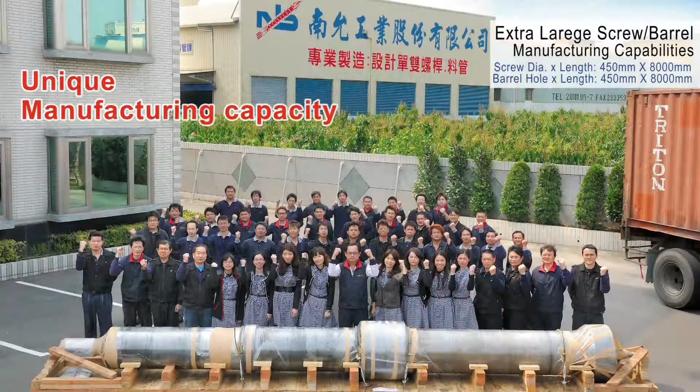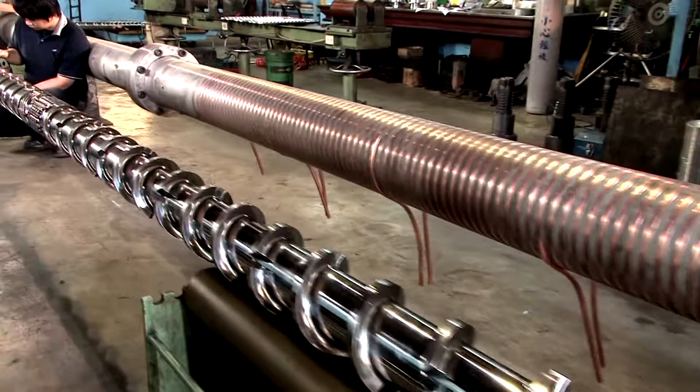Nan Yun Industrial Company Limited, established in 1993, specializes in design and manufacture of complete series of screws and barrels for plastic and rubber extrusion and injection machines, including all types of screws with special alloys and special flights that meet all clients' needs in extrusion and injection molding.

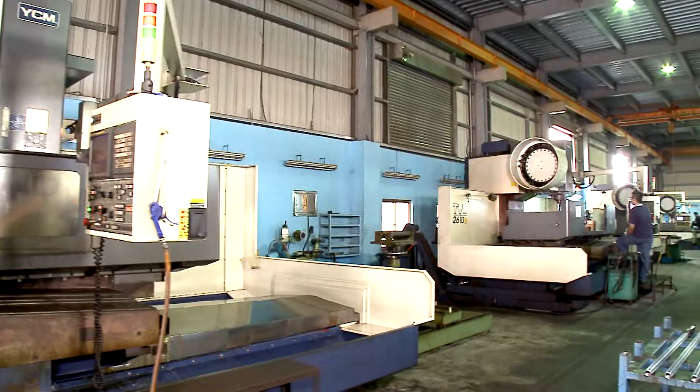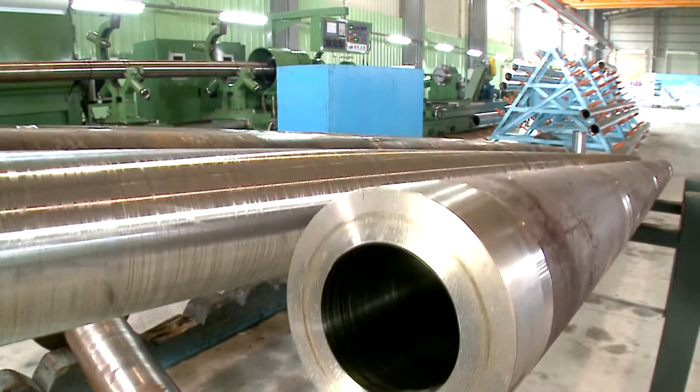By upholding our ideals in innovation and breakthrough, technological leadership, insistence on quality, Nan Yun Industrial has been growing steadily, continuously surpassing our competitors, and has achieved in producing high performance and highly versatile products that others are unable to make. After working persistently for more than a decade, Nan Yun has become the largest and most modernized screw and

barrel manufacturer in Taiwan, with a monthly production capacity of more than 500 sets. Nan Yun holds the leading position in the Taiwanese industry, in which its product quality has received high recognition by clients around the world.

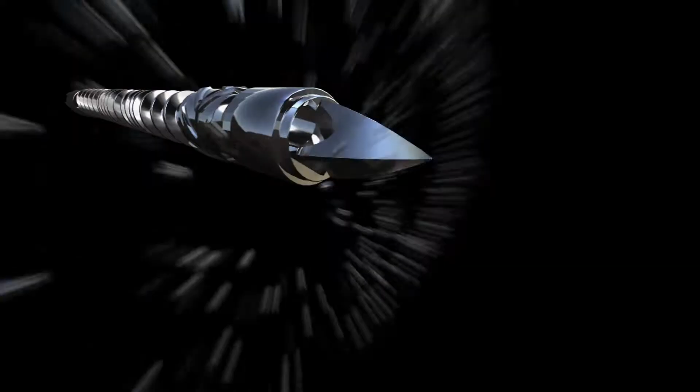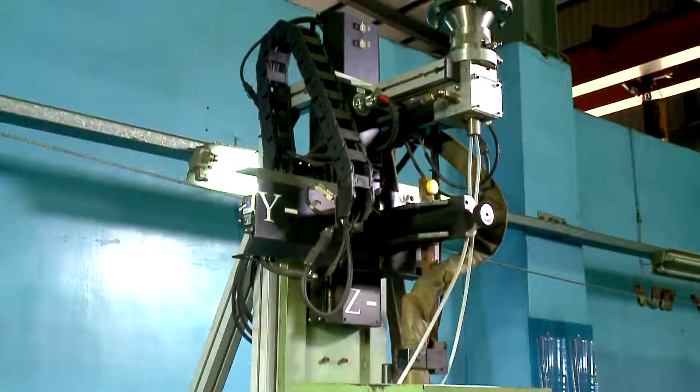Consolidated production. Pursuing the highest quality of screws and barrels is Nan Yun's persistence. Nan Yun has invested heavily on purchasing various advanced processing equipment, gradually established a complete integrated manufacturing process, which all of the processes are done in modernized production lines in sequence, so that the quality of each manufacturing process is

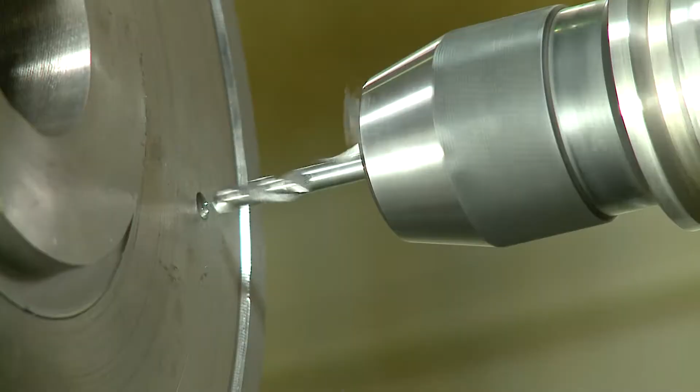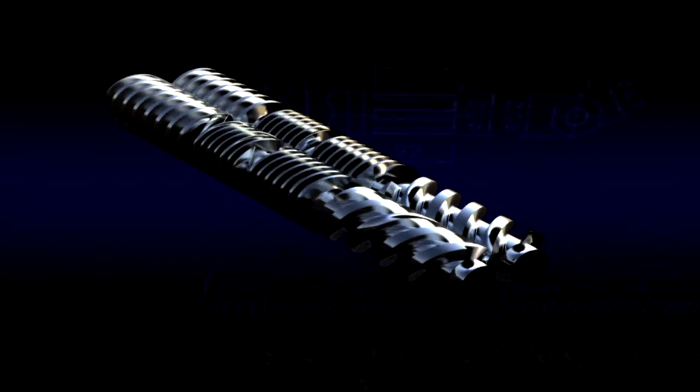fully under control. Nan Yun's design department is capable of conducting comprehensive analysis based on client's machine model, production capacity, and resin property, dedicated to design the optimized screws and barrels for every client. Every screw parameter is based on professional theory and design with extensive practical experience. These ensure that Nan Yun's design and manufacturing of screws and barrels can truly help clients to increase product quality and production efficiency.

Raw materials import. Nan Yun utilizes imported raw materials from Japan's Daido, Hitachi, Sanyo Steel, and more. Nan Yun offers clients the most suitable and cost-effective material selection based on the production capacity requirements and the property of raw materials for plastic and rubber extrusions and injections.

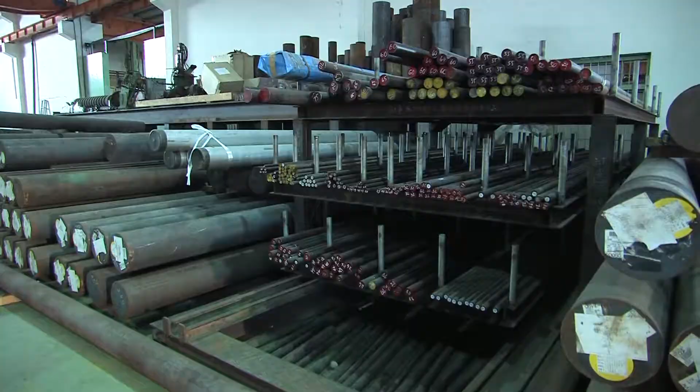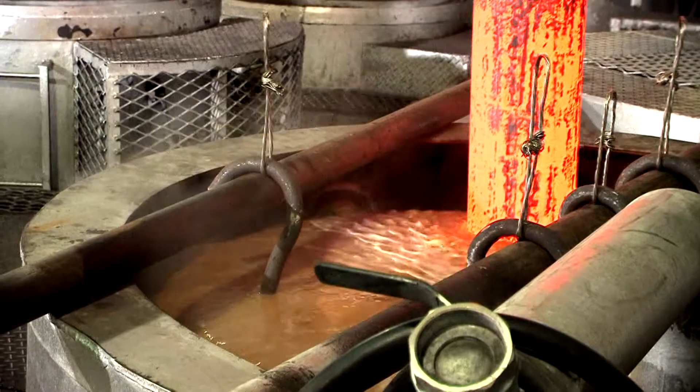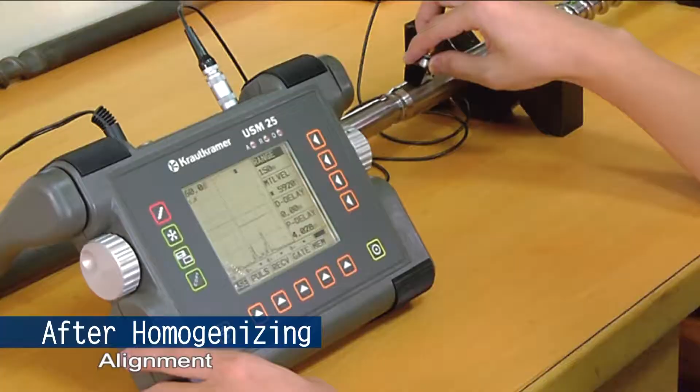Homogenizing. Adjusts material's hardness, increases the tenacity, allows the structure of inner molecules to become finer and more stable to prevent material deformation during processing. After the steel materials are homogenized, they undergo ultrasonic crack inspection, making sure that there are no defects such as welding seams, cracks, pores, before proceeding to the actual processing.

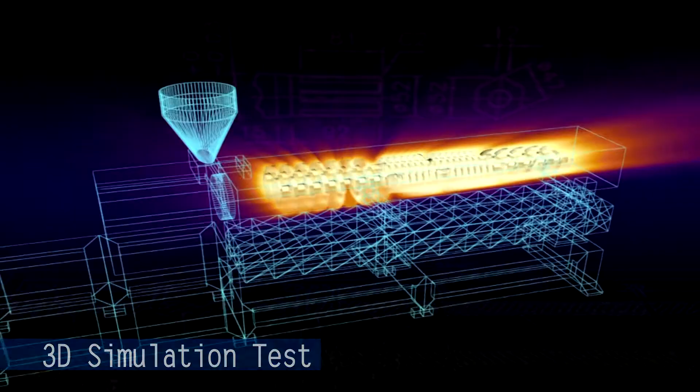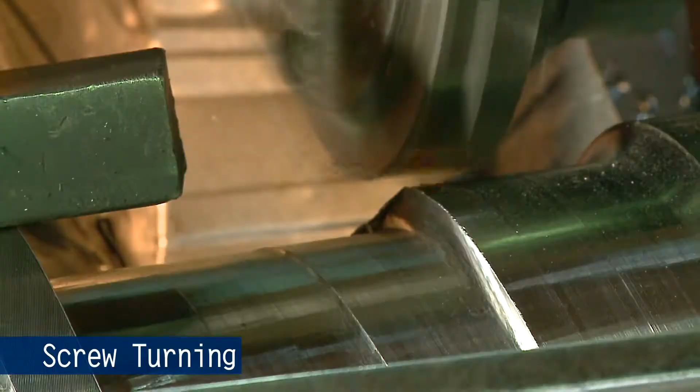Prior to the actual processing, our outstanding technicians perform 3D simulation tests based on clients' drawing schemes to make sure the gear gaps of the twin screw conform to the correct values. From screw rough turning, rough thread rolling, to fine thread rolling and stirring, each process is operated by specialized machines and professional divisions of labor for minor tasks of each process.

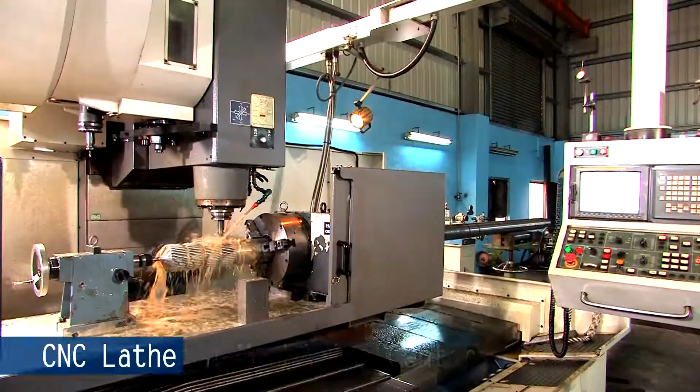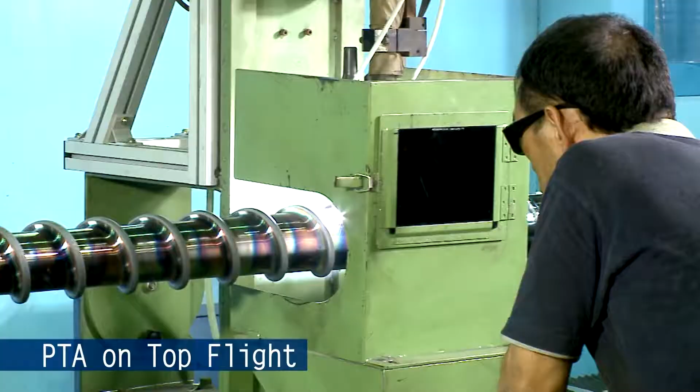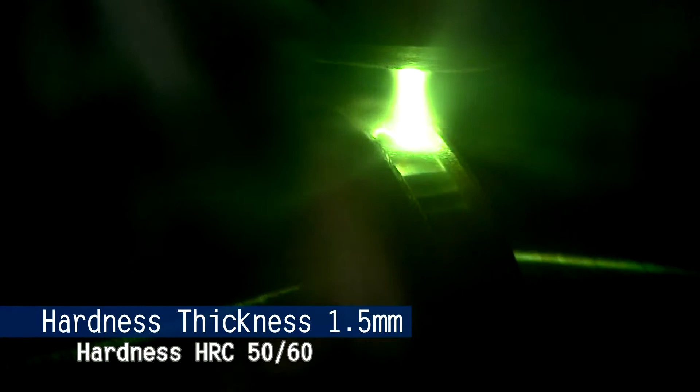For a screw to perform its main functions, such as material feeding, conveying, compressing, melting, exhaustion, and homogenizing on the machine, the PTA nickel tungsten-based alloy spray welding technology fuses the weld tracks and the base metal completely. The hardness layer of a single side is 1.5 millimeters, with a hardness of HRC 50 to 60 degrees. It is durable to wear and corrosion, greatly extending the service life of the screw.

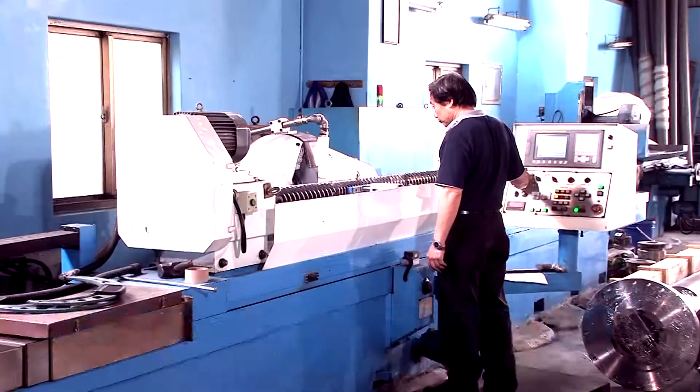Thread polishing. Roughness up to Ra 0.3 microns. Outer diameter grinding, straightness and roundness can reach 0.02 millimeters. The boring integrated with the barrel enables straight and precise processing angle. Even thickness of bore diameter effectively enhances the feeding smoothness of the screw.

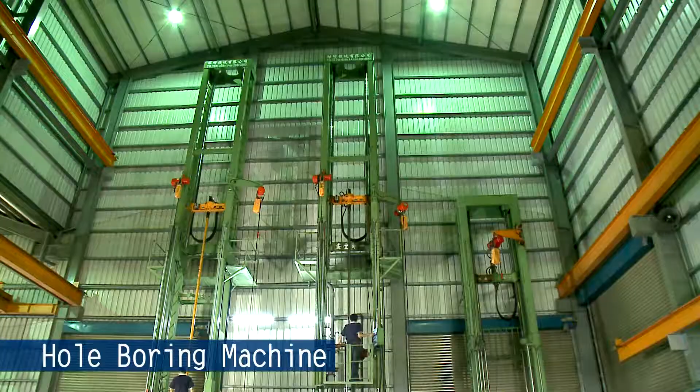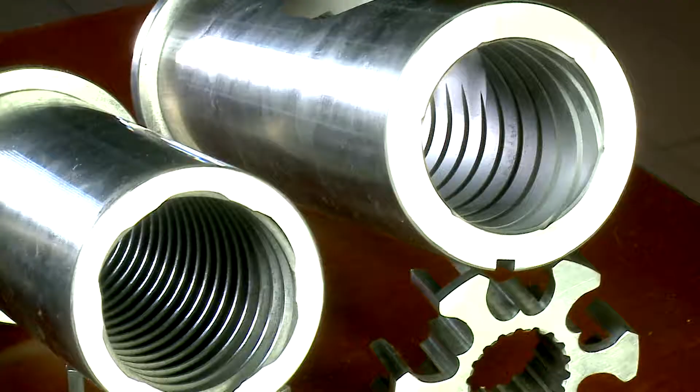Interior rifle groove. Appropriate rifling lines are designed per client's requirement. Automatic computerized precision processing maximizes the production capacity of plastic and rubber machinery.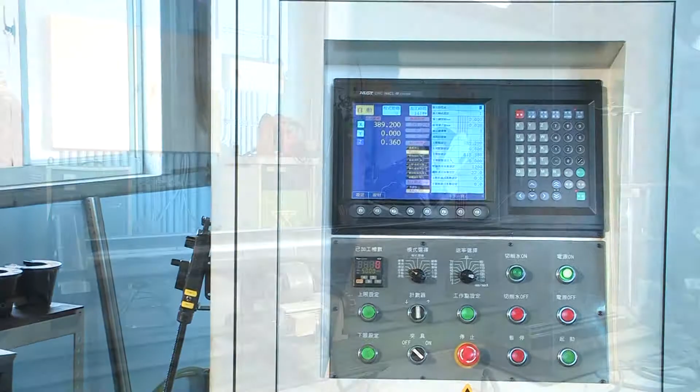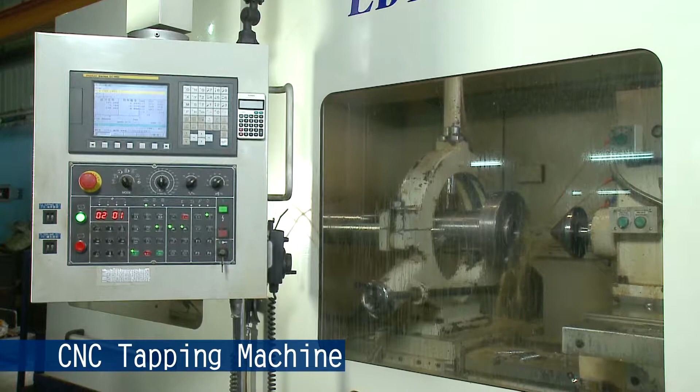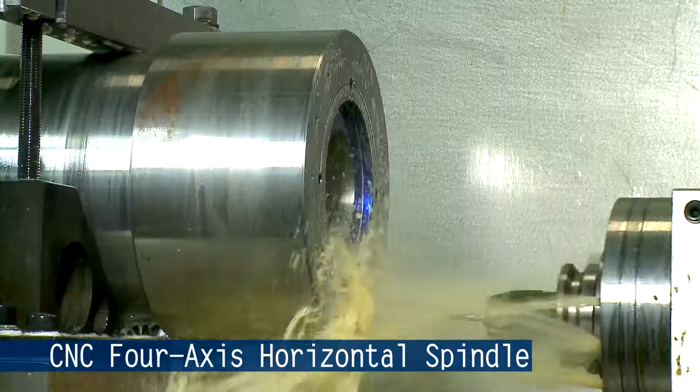Flange drilling. The drilling is preceded by diagonal drilling to avoid any deformation caused by the difference in temperatures, precise bore diameter dimension, with appropriate thread pitch. The barrels and the machine body are tightly latched to each other, creating excellent solidity.

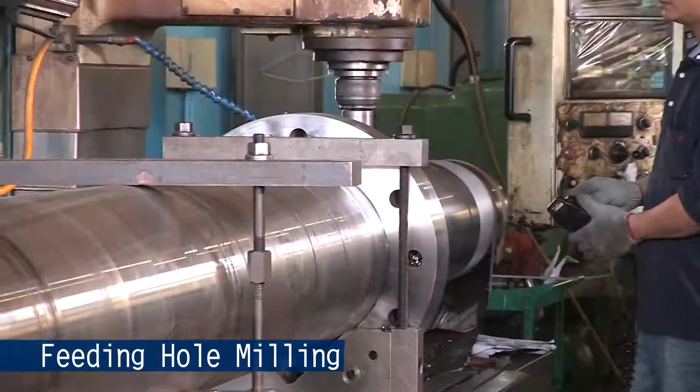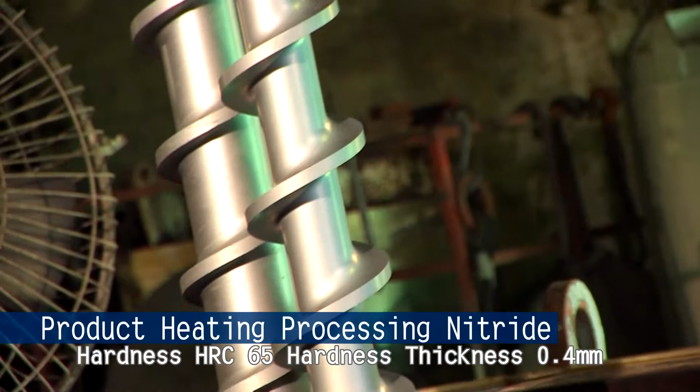Feeding hole milling is processed after nitrogenization. This can ensure the straightness of the barrel bore diameter and reduce the friction with the screw. Nitride. The process increases the thermal resistance and hardness of the material surface and adjusts the hardness and ductility of the material, which increases its wear durability, reduces the wear rate, and extends its lifetime.

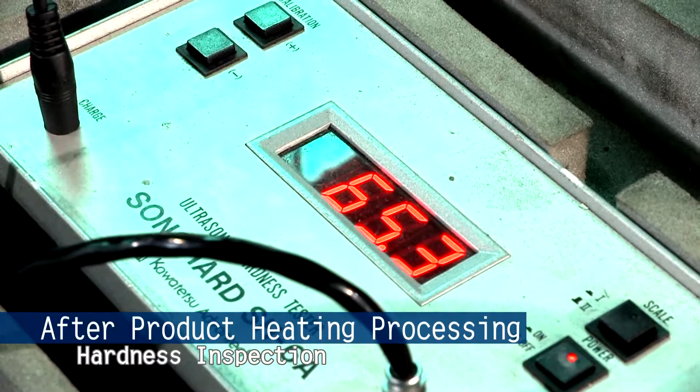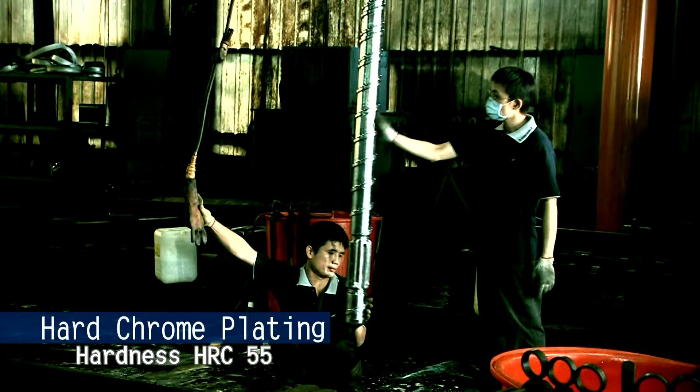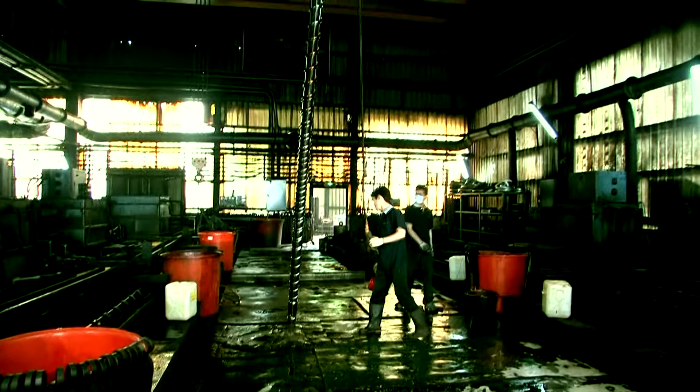Electroplating. Divided into hard chrome plating and phosphor nickel alloy plating. Hard chrome plating can increase the lubrication of plastic and rubber materials, prevents scratches on the surface, enables the screws to maintain their flow coefficient during the melting process, and stabilizes the extrusion and injection performance.

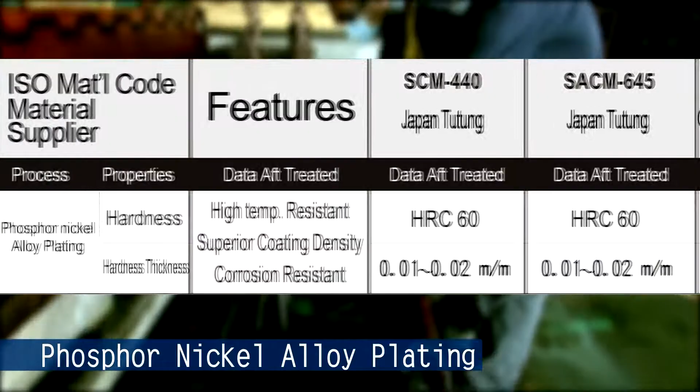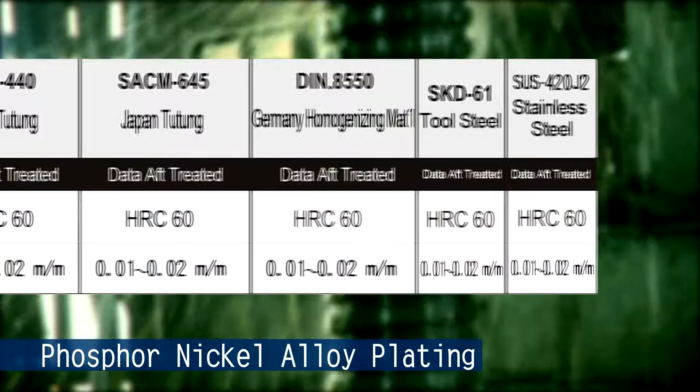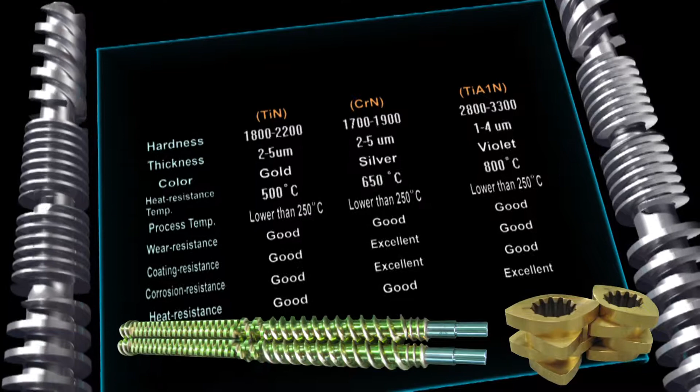Phosphor nickel alloy plating gives materials properties such as high temperature and corrosion resistance. It can also greatly raise the adhesion density of the melted materials to satisfy melting and mixing requirements of all kinds of resin in every plastic and rubber injection machine. PVD ion plating is divided into nitrogenized titanium, nitrogenized chromium, nitrogenized aluminum titanium. Advantage: high thermal resistance, super wear and corrosion resistance.

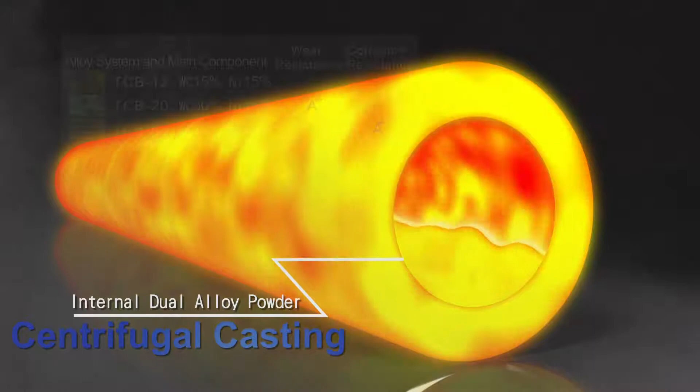Bimetallic barrels. To achieve barrel straightness and roundness, they are ground after going through centrifugal casting and rough boring. The thickness on a single side of the barrel is 2.5 millimeters. It has the properties of wear durability and corrosion durability, longer service time than normal barrels.

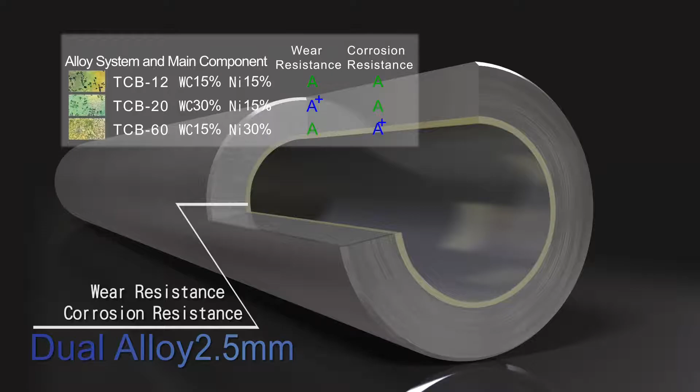Persistence on 100% quality control. As the performance of the machine and the quality of the products highly depend on screws and barrels, every screw and barrel manufactured by Nan Yun has to pass strict, highly standardized inspections before leaving the factory.

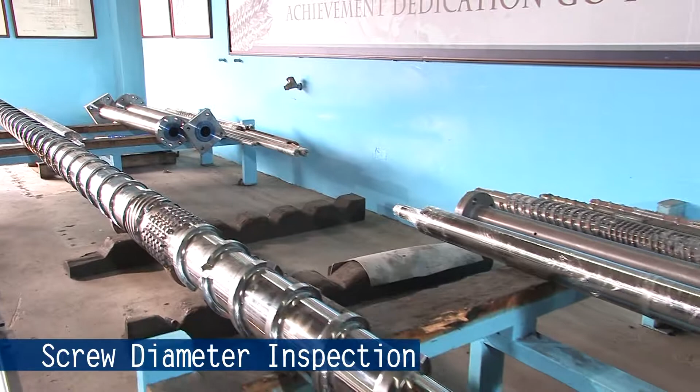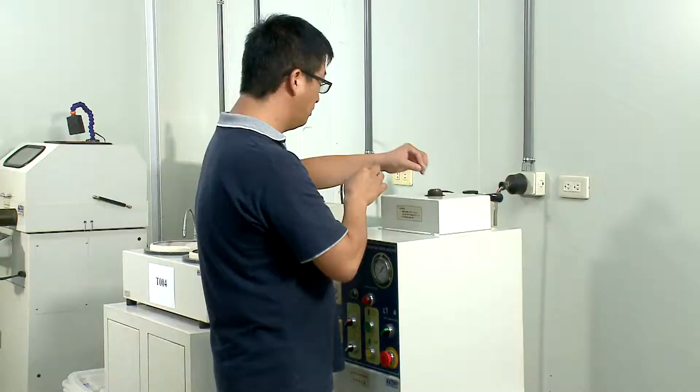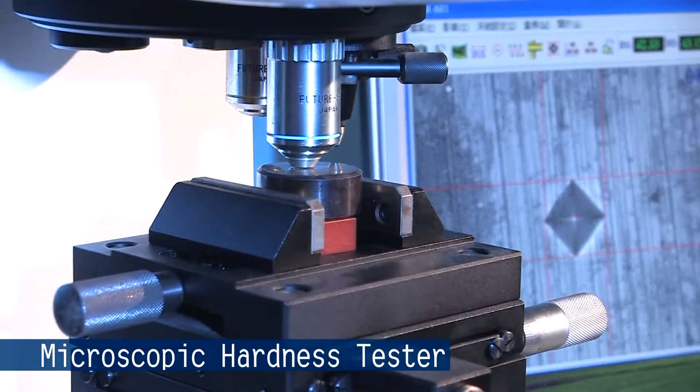Nan Yun's QA division operates many precision inspection instruments to thoroughly perform material feeding, processing, and finished product inspections. The highly strict process control satisfies the quality management demands from the clients and guarantees the quality of Nan Yun's products to reach perfection.

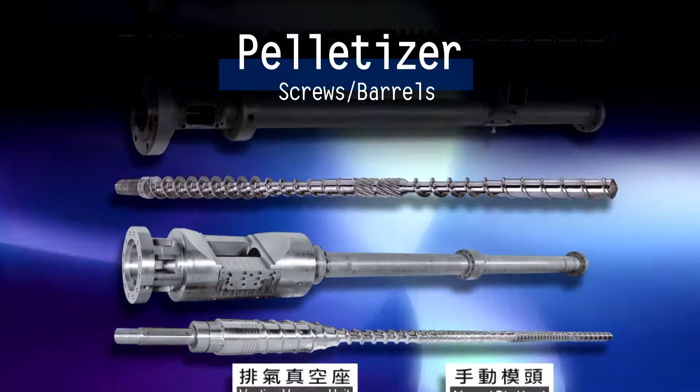Product introduction. Inflation machines, specialized screws, barrels, and various stirring products. Pelletizer, specialized screws and barrels. Blow molding machines, specialized screws and barrels. Sheet extruding and laminating machines, specialized screws and barrels. Co-rotating twin screw extruder, specialized screws and barrels.

PVC counter-rotating twin screw extrusion machines, specialized screws and barrels. Planetary products, specialized screws and barrels. Plastic and rubber injection molding machines, specialized screws and barrels. Static mixer, specialized screws and barrels.

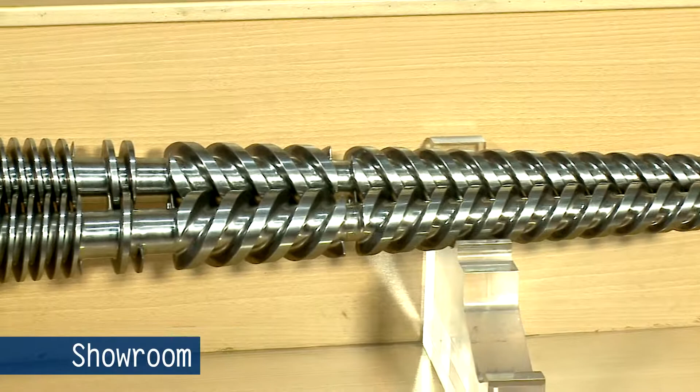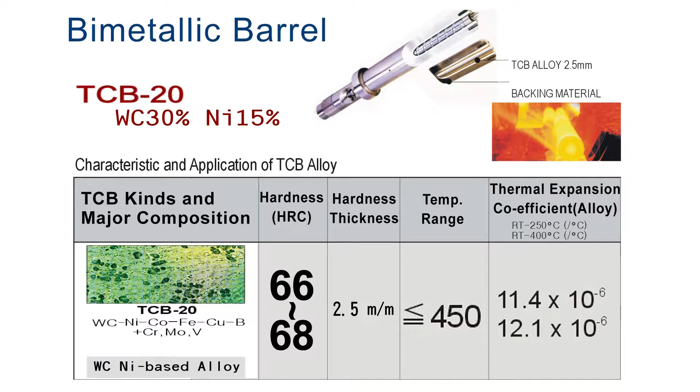Bimetallic barrels: TCB-12, abrasion and corrosion resistant; TCB-20, super abrasion resistant; TCB-60, super corrosion resistant.

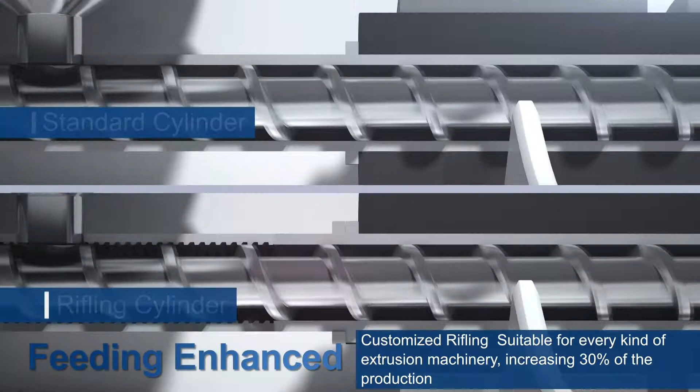For many years, Nan Yun is persistent with its products and has maintained the product quality with a highly strict standard, and that is why our screws and barrels are highly recognized by domestic and international injection and extrusion machine manufacturers. We have established many long-term cooperation partners, and the sales domains are spread worldwide.

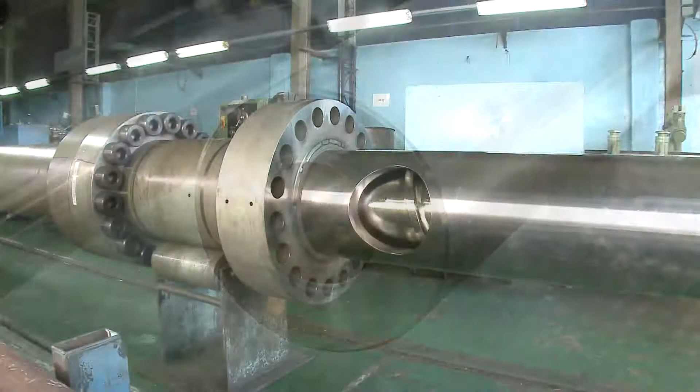In the future, Nan Yun shall continue to uphold our ideals in innovation and breakthrough, technological leadership, insistence on quality, as we insist to offer clients the best products. In addition, we shall face the changes and challenges of the industry with a more pragmatic attitude and march forward towards a globalized, dynamic, and continuous business operation.